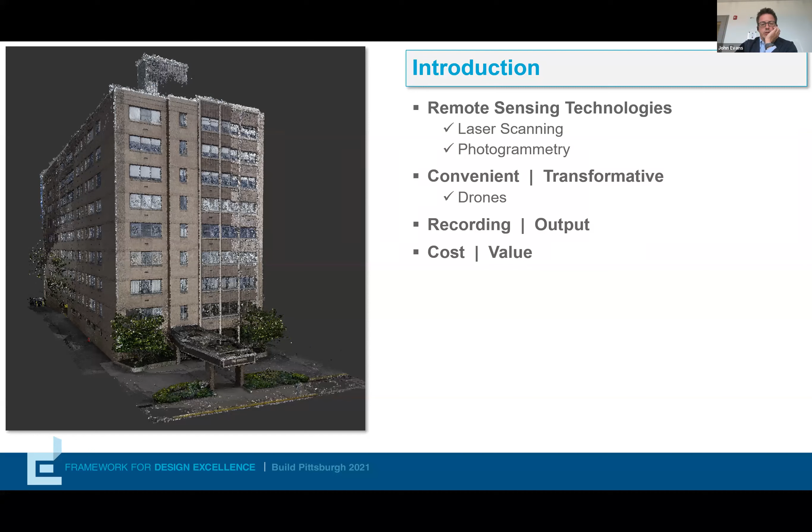So the first, laser scanning, we're not going to get into the details of how it works, but essentially this is the LiDAR system that you see on self-driving cars, where you're actually actively sending out a signal, receiving that signal back, and using it to develop typically a three-dimensional point cloud of the objects that you're scanning.

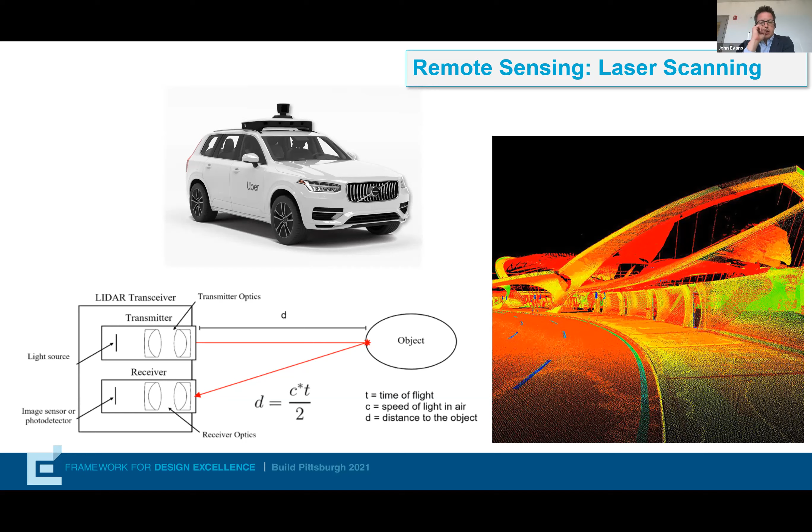Cars are doing this from a single moving point, and they have to do it really rapidly. For buildings like the old TWA terminal that you see on the right, it's done from usually a series of, it could be 50 or 100 stationary locations, but the principle is kind of the same.

Photogrammetry, which I think people are a little less familiar with, is actually a technique that uses the idea that by identifying common points on a photograph or a series of photographs, you can then determine precisely where those photographs were taken from. And you can actually start with multiple photos that have overlap to construct a 3D model of the geometry based solely on those photographs.

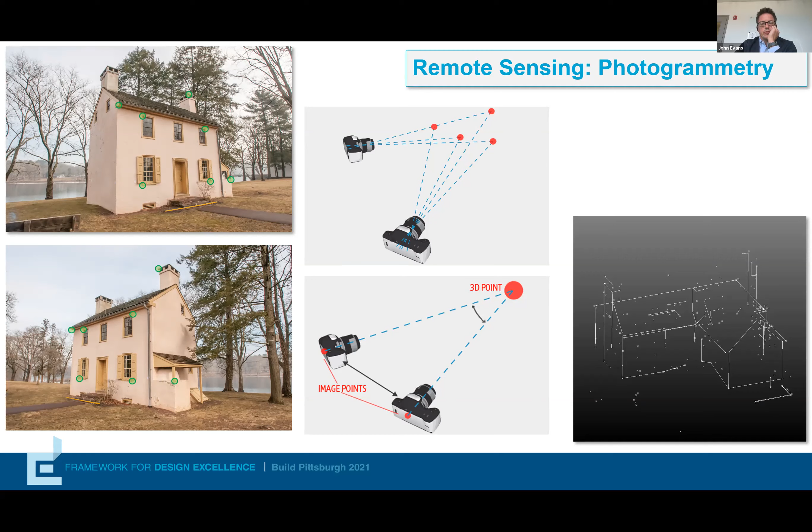So two very different techniques, and we'll get into how they're different and what those differences mean in a practical sense later on in the presentation. Something I think is worth thinking about as we talk about these different technologies is the idea that, in our industry, there are technologies that are, I call them convenience technologies.

And it sounds silly to say, but I consider the transition from hand drawing, which you see on the upper left, to AutoCAD really was a convenience thing, right? The product is still the same. You're developing a 2D line drawing. You're using a different technology to do it, but at the end of the day, it's still two-dimensional.

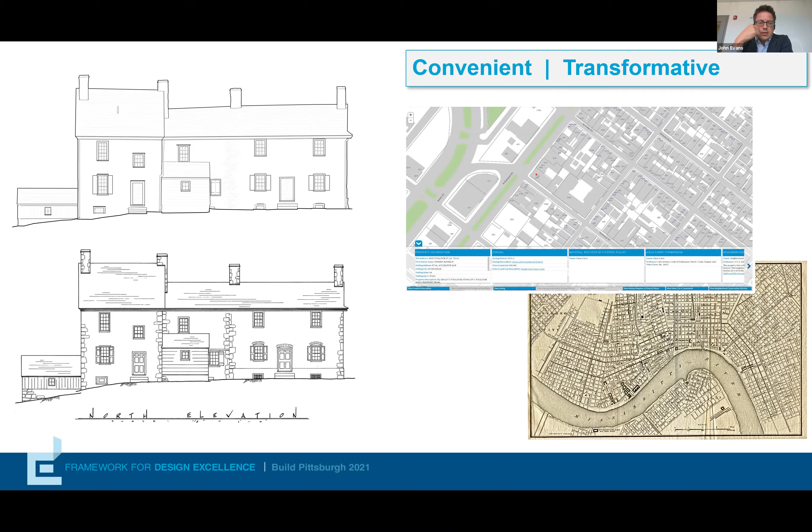When you look at something like the transition from a 19th century map to GIS, that's actually transformative. You're taking something that was always just a two-dimensional depiction and you're layering onto it a database of information that you can access. So I think as we go through these things, especially when we start to talk about drones, it's important to really think, okay, is this something that's actually transforming the data, transforming the way we can work? Or is it just something that's convenient?

A drone, for example, flying a drone is certainly easier, but theoretically, at least, you could obtain the same data most of the time if you had, say, a 100-foot lift that you could move around the building really quickly. The drone's saving time, it's saving money, but it's not actually transforming what you can achieve at the end of the day.

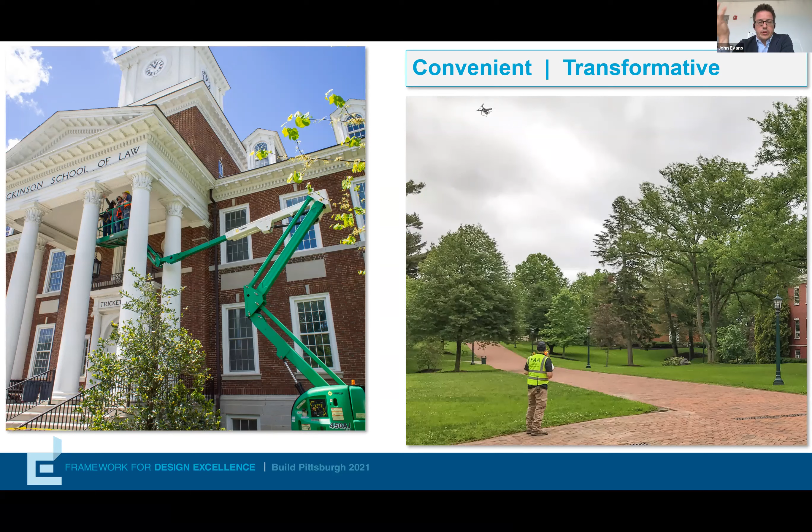Similarly, I think it's important to think about the difference between recording technologies, whether it's a tape measure, a camera, or a laser scanner, versus the output. So the output may be a simple 2D floor plan, regardless of the technology that it was recorded with. And a lot of that also is woven through the presentation that we're going to talk about today.

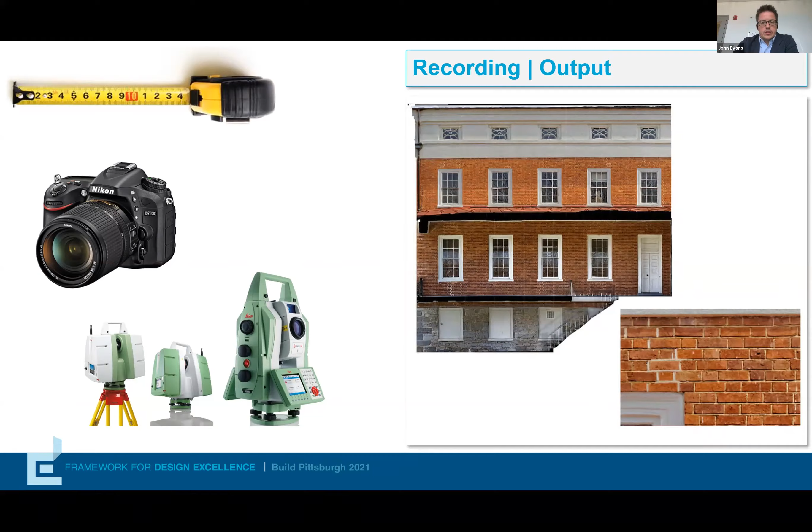And then finally, and this is kind of funny since Tyler did his introduction, but I had this slide queued up. And what I wanted to show is that there's this idea of documentation and a temptation to say, let's just capture everything. And let's capture it at the highest possible resolution we can, and then we have it all and we can figure it out. But a lot of times that ends up really costing money, resources, time, without delivering real value to the project.

And this was actually an example of a point cloud where we determined that because of the nature of the project, we'll talk about that a little later, we didn't actually have to scan the roof at all. So we didn't really need the data on the roof as long as we can accurately capture the exterior elevations.

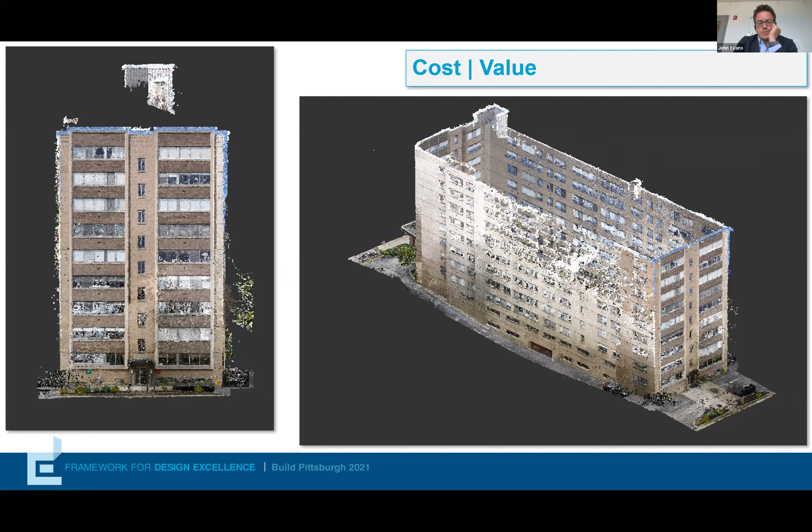So with that, I'm going to turn it over to Sean and to Matt, who are going to talk a little bit about laser scanning. Yeah, thanks very much, John. Hi, my name is Sean Higgins. I'm from Langan Engineering, and I've been involved for quite some time with John and others doing some laser scanning work.

The equipment has changed in that realm quite a bit, but also terrestrial laser scanning has changed quite a bit, in that you can now get these scanners placed on a backpack. So you can actually walk through a building or even have a handheld wand type unit and gather existing conditions of building interiors. Similar to what John mentioned from the photogrammetry, they get stitched together by finding common points and then putting those together and creating pretty decent output.

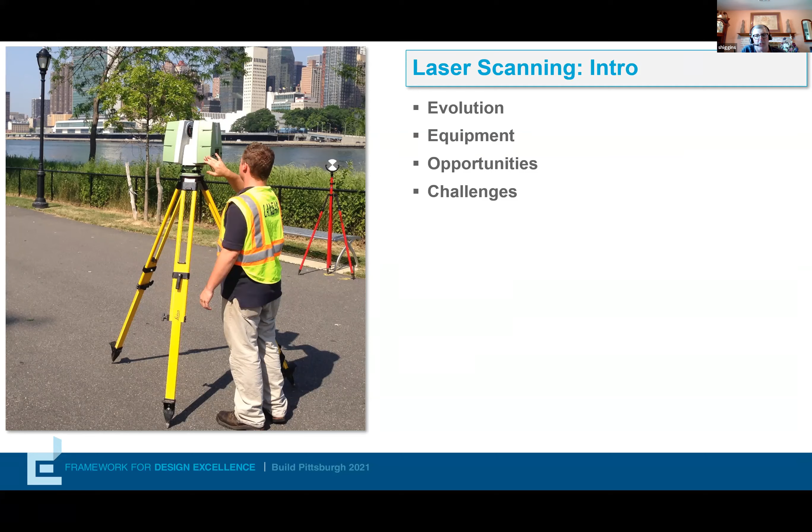The big difference here is in the equipment. It's a little bit cheaper now, but you just need to be careful with the accuracy. So it's very, very important that you're very specific about what you need as a deliverable, what the accuracies are that you need when looking at contracting with somebody. And then Matt will go through some of the opportunities and challenges and a little bit more detail about the scanning services that you can seek out from similar providers.

Thanks, Sean. Yeah, so actually, talking about this presentation, Mr. Evans, John, brought up a good question. He said, hey, let's look 10 years ago and compare the differences 10 years ago to today. It was kind of funny because it was like a trip down memory lane. So this is what scanner was pretty common 10 years ago. On the left-hand side, you can see one of our crews working.

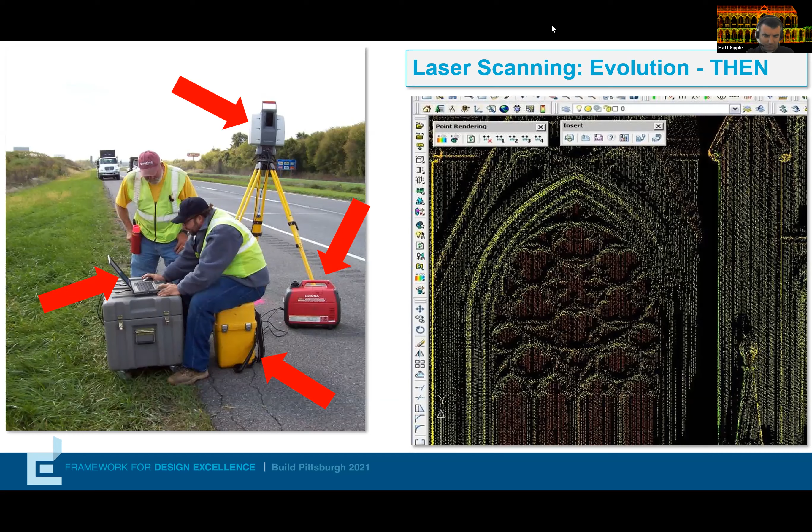So we'll fast forward 10 years. A lot of advancements have been made in scanning technology: the speed of scanners, how much data they collect, the resolution of that, the accuracy. So you can see now how much different scanners are now. The manufacturers of the scanners like to brag now, saying, oh yeah, we can get up to 1 million, 1.5 million points per second. So the scanners have gotten really faster, and thanks to a lot of the advancements in the hardware, they've also gotten smaller.

The scanners now too, the mirrors go all the way around, whereas previous scanners could only go to a certain range. So now we're picking up everything. John, you want to go to the next slide?

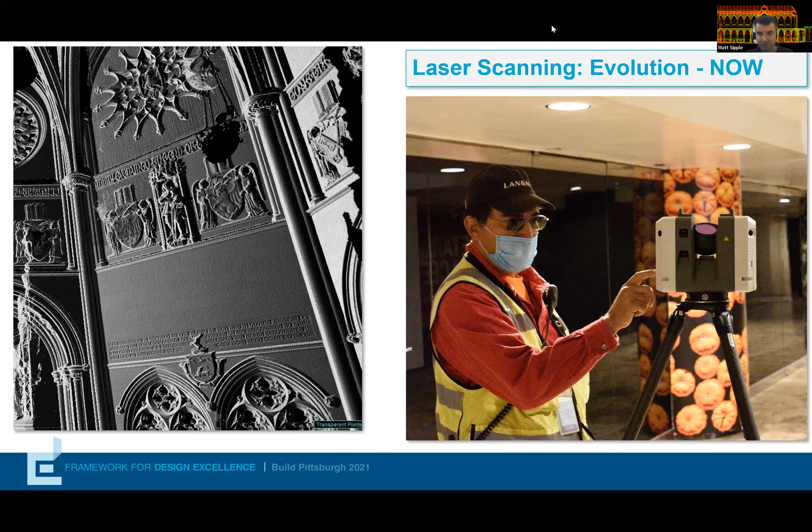One of the biggest challenges with laser scanning is that it's a line of sight technology, meaning if you can't see it, the scanner's not going to be able to see it. There are some non-destructive ways to get inside of walls, but we can't see. One of the biggest questions we always get is, "Hey, can you tell me where the studs are on the wall, or where the pipes are on the wall?" You can't do that because again, laser scanning is line of sight.

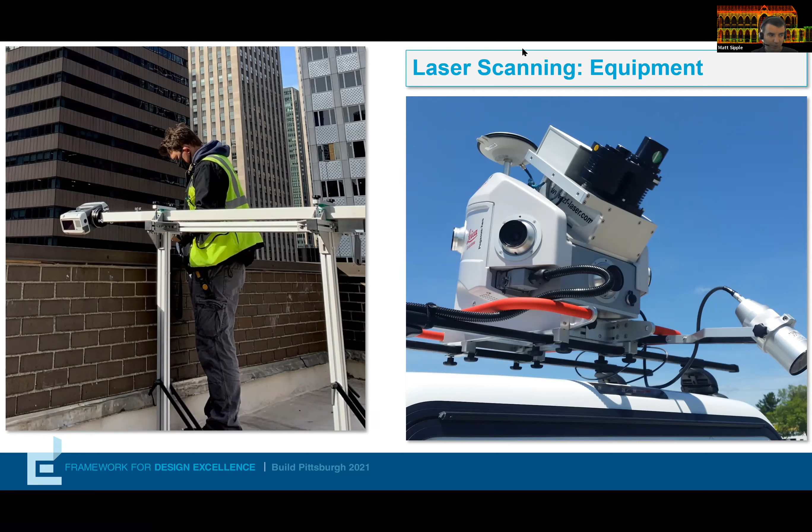On the right hand side, as Sean was mentioning earlier, is mobile scanning. That's really become a big development over the last probably 5 years, where the scanners aren't fixed to one place with a tripod. You can now put it on top of a vehicle. This is a truck. We put them on top of carts. You could even have them on boats. We've even done a few projects scanning from boats, and it's really opened up how we're able to use the scanner. John, if you can go to the next slide.

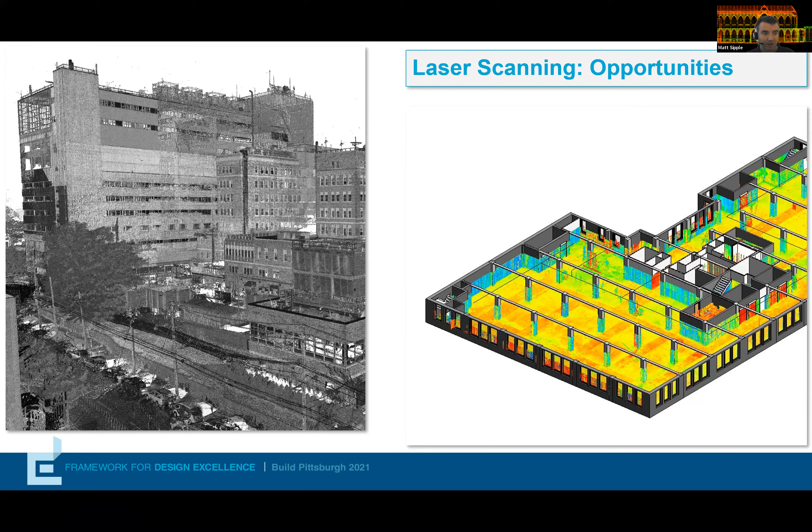They were like, "Well, we had to scan it. Why wouldn't we scan it? It won't take us that long." It's a lot quicker to do smaller projects, as well as the large, complicated projects like you see on the left. Next slide, John.

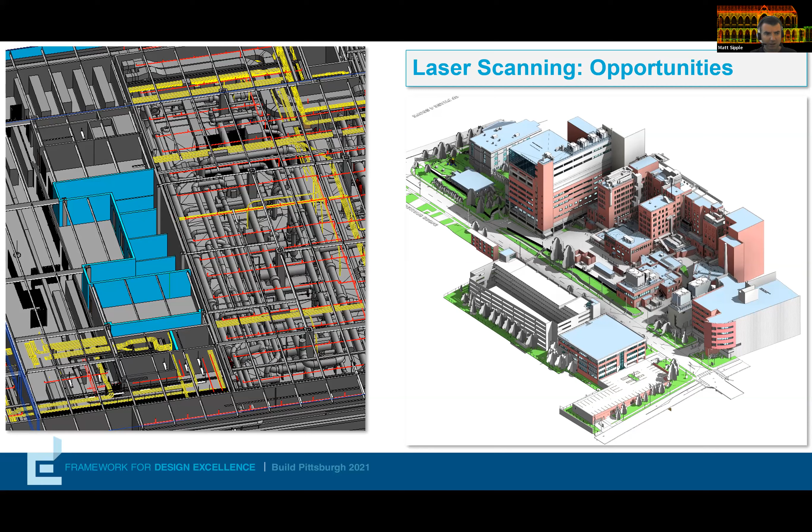Also, modeling. There's a lot more use of BIM, especially over the past 5 years. A lot more companies are using BIM now. 10 years ago and before that, with a lot of scanning, we were taking all that 3D information and just reducing it down to 2D drawings. Now with the rollout and popularity of BIM, scanning is perfect for that because it collects a lot of information in 3D, and we're able to use it to create existing condition models that we hand over to other teams. I think we have one last slide. So the one last thing we were talking about is some of the challenges.

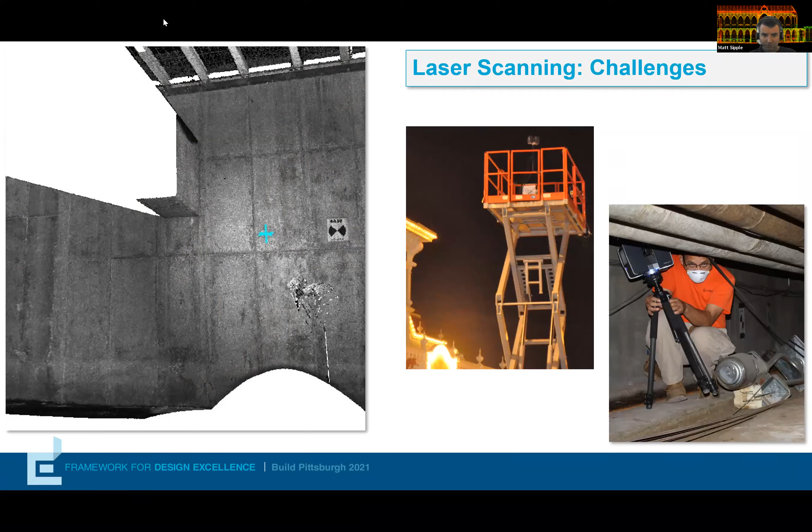So a question that comes up a lot is, can we use a lift to do that? And we can, with a scanner, but you really need a stable platform. So there's a lot of challenges when you start trying to get higher up on buildings to get some stuff that you may not see from the ground level. So that's one of the challenges that we still run into. Now I'll turn it over to Peter and he can talk about his work with photogrammetry.

All right, so everybody can hear me all right? I don't see my picture coming up there. I'm not sure. Yep, you're good. You're on video. Okay. Mostly, your beard. All right, so let's go to the next slide.

I got started working with photogrammetry 30 years ago in the 90s when I was working as an architect in France. I found a little company that was doing work at the Notre Dame, took a career change, wanted to understand what this was like, and eventually came back and started a company here in the US. Photogrammetry has been really an interesting thing for me. The notions behind photogrammetry really do predate even photography. It has to do with the relationship of a single point and an image plane.

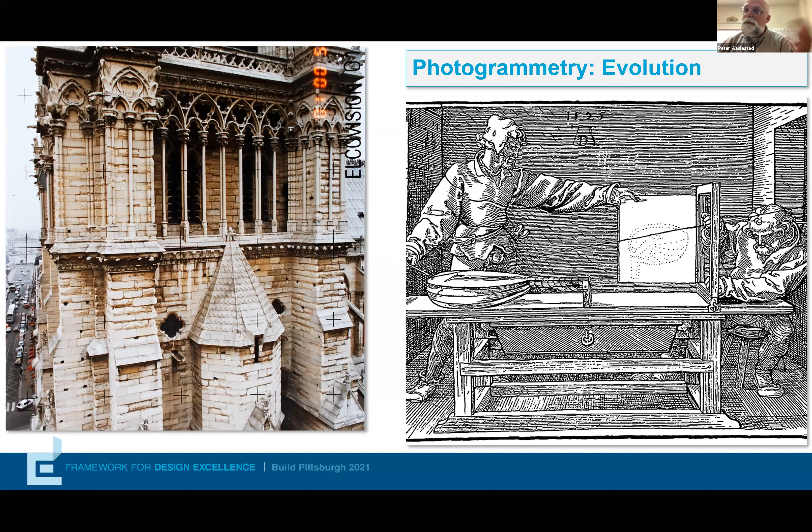And this drawing on the right, which is from the 16th century by Albrecht Dürer, is showing a way of understanding an object from a single point of view through a picture plane by tracing rays as they pass through a plane to create a perspective image. So the notions are ancient. But what happened in the late 80s and into the 90s was that computational power allowed these situations to be mathematically modeled and then back calculated so that you could establish camera relationships and then pull 3D measurements out of them. So it was a big leap forward. Go ahead to the next slide.

So when I was in France, this on the left is the Basilique Saint-Denis, we were basically making drawings that were being plotted and put onto paper and then given to stonecutters in the field. When I came back to the US in '92, CAD was starting to take off, and so a lot of the drawings I made were for print, but also for people using CAD.

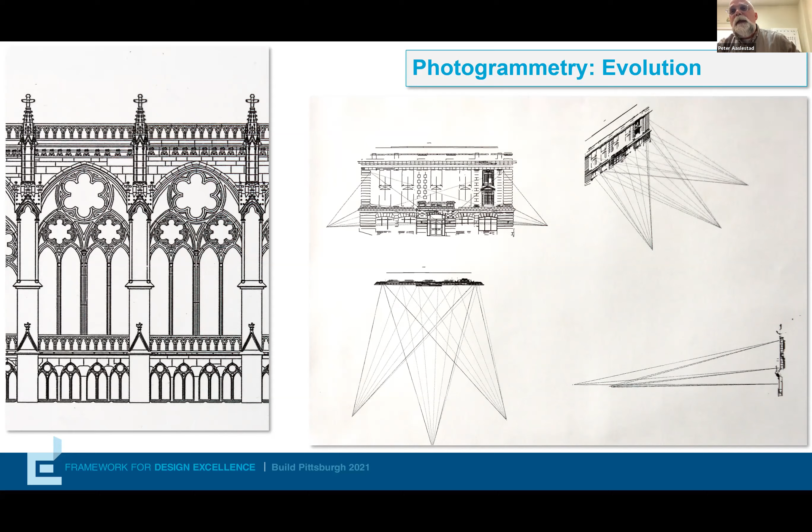Back then, photogrammetry did not produce point clouds. You were using photogrammetry to determine XYZ locations that were specific to a point on the building, but then you could connect them together and make these skeletal 3D drawings like you see on the left. And they served really as field notes for making measured drawings. On the right is a HABS project that I worked on, where the deliverable is a 2D drawing. My field notes essentially were a 3D drawing that I was looking at, interpreting and turning into a 2D drawing.

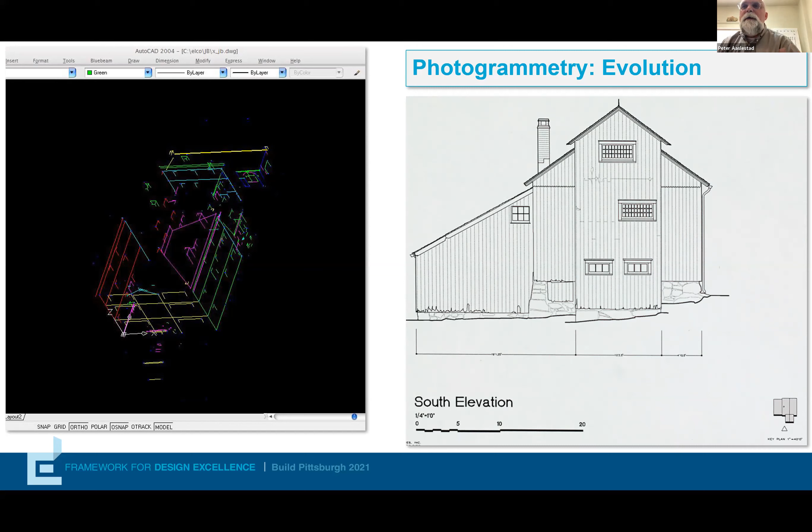But the points I was choosing, we used to call them smart points because you weren't looking for an edge from a cluster of points. You were asking of the photos, what can you tell me about the building? And you were saying, I want to know this particular point. And all of your points could be traced back to a photo-identifiable location. So you were sure that you were talking about one corner as opposed to another corner because you were

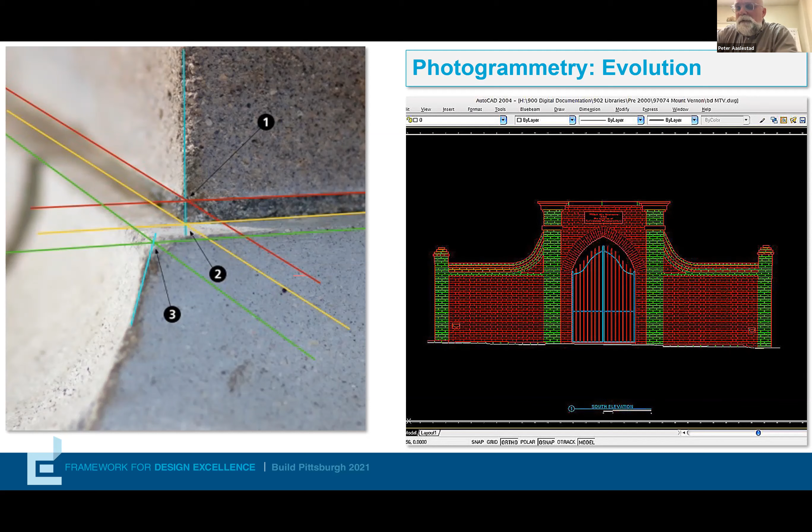manually selecting it. And then when you were working with flat planes, such as on the right is the tomb for George Washington at Mount Vernon, well, him and his whole family. We were charged to locate every single brick in this, and so what that meant was using the smart points to get a layout of the planes, but then we were tracing on images to get the actual photos, which was obviously very time consuming.

And so around 2000, I started thinking, what if we combined digital photography, which was just coming around then, with line drawings. And so this project, this is a theater building at Wesleyan University in Connecticut. A lot of it is made up of cut stones. These I measured with photogrammetry, making a line drawing. And then for all of the ashlar pattern stones, I thought, what if we captured those and represented them with

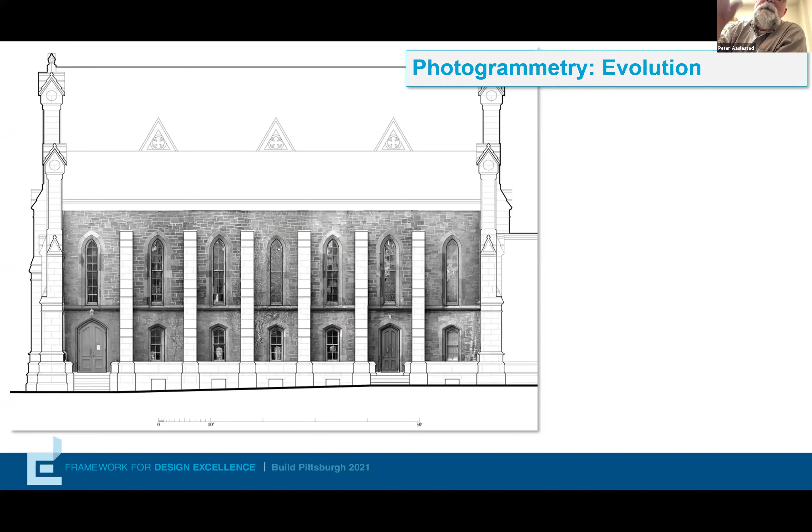flattened digital photographs? And these were shot with a Nikon, was it 990, which is a 3.2 megapixel camera. At the time, it was pretty good, and it did the job. This was using Photoshop to sort of tweak everything to make it fit, and we did our best to make it as accurate as possible, so that an architect could map a single conservation technique to a single stone, and get the contractors to come do the right thing in the right place.

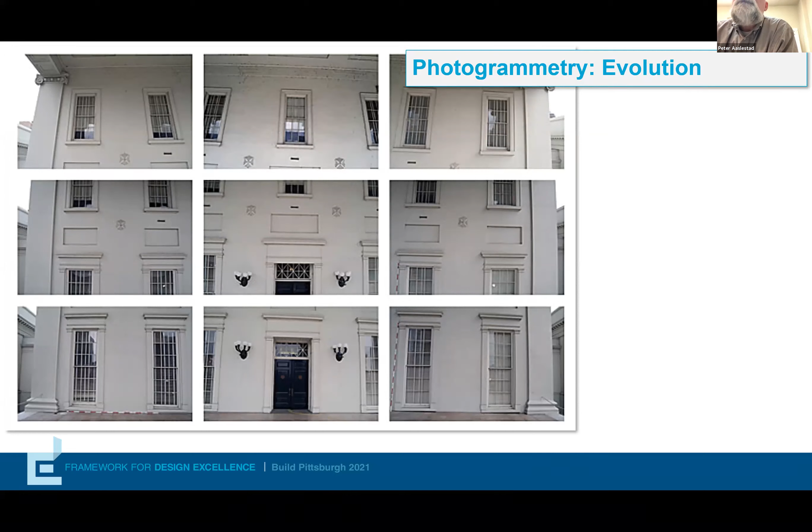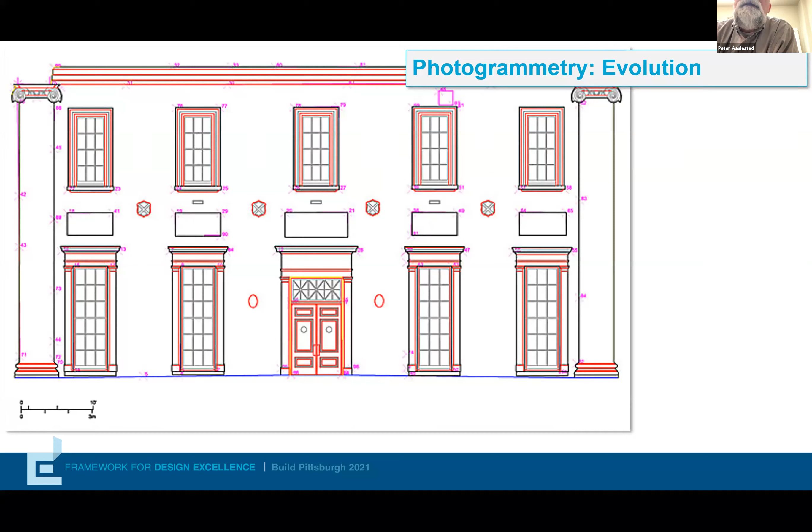And then as the 2000s moved on, this notion sort of became part of the photogrammetry software, so that, this is the Virginia State Capitol we're looking at here, you could take a grid of photographs such as these, and then, next slide, use photogrammetry to create a line drawing to get measured points. That's what all the little purple dots are, numbered points that are extremely accurate in 3D, and then to interpret that into a 2D drawing.

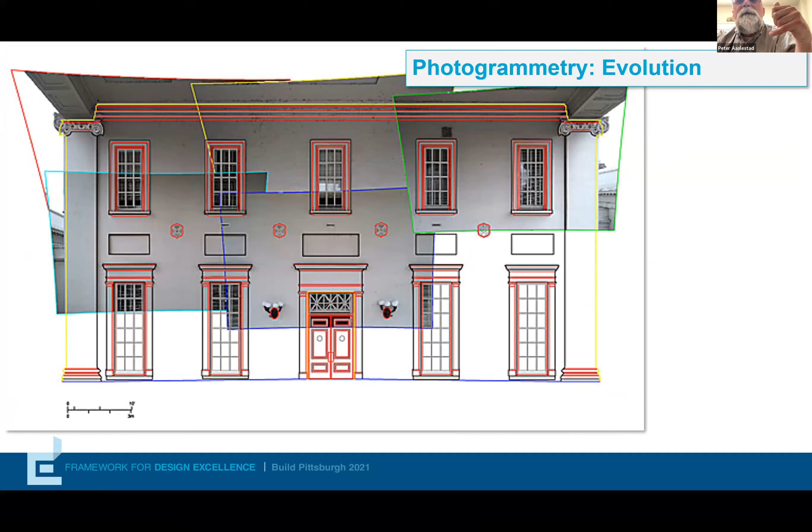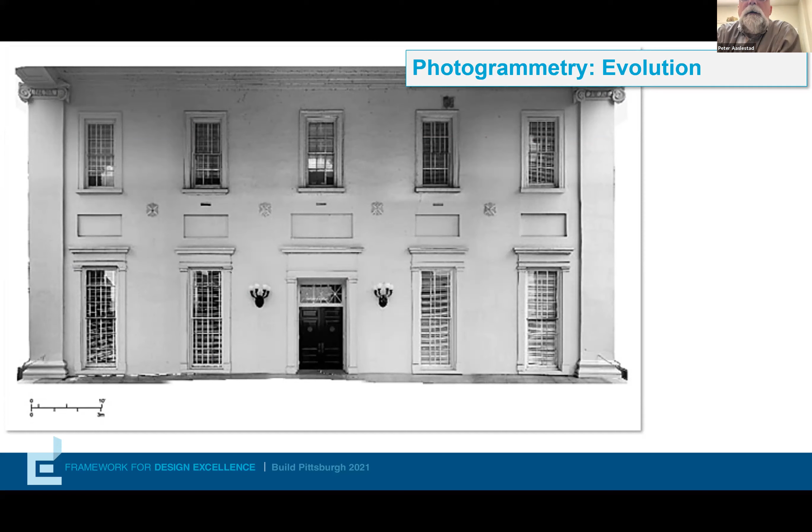And then, since we knew a lot about the camera and lens combinations, we could very precisely remove the distortion from the images and combine them together as an overlay here, and then blend them together and come up with an image like this, where we had to ask ourselves, is this a drawing? Is this a measured drawing that has the same rich data as a photograph? Or is it a photograph that behaves like a measured drawing? And of course, it's both of those things. We called these hybrid drawings at the time.

And what we were able to do going forward from that point was to mix these rectified images together with the line drawings. And in some cases, we would make a detailed drawing of a structure, and then we would have to figure out which planes we're going to treat with rectified photography. And together it could make a very complex, large drawing.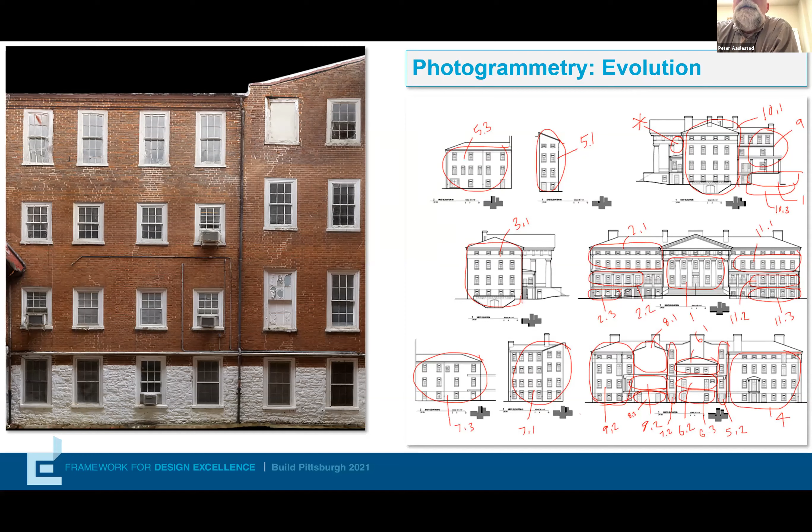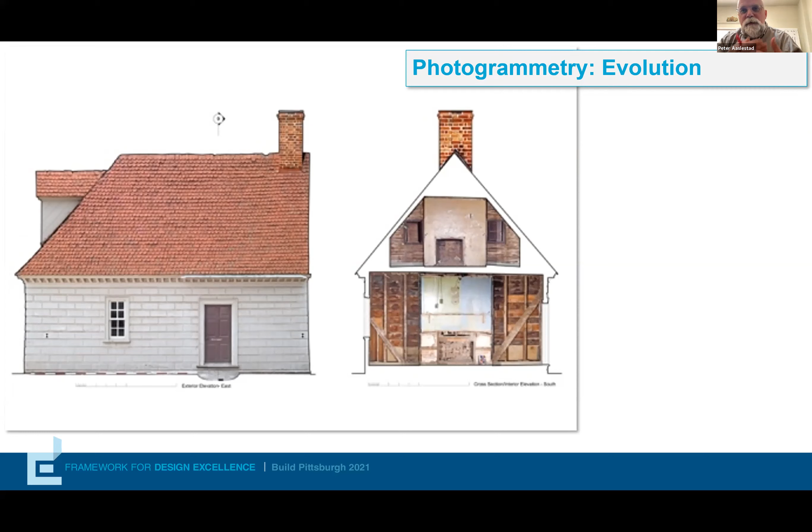Or this is the gardener's house at Mount Vernon. We could also do it really kind of small scale and intimate, and also go inside the building and connect the rectified planes on the inside to the outside, as well as taking the planes themselves and seeing them in 3D. Like the roof on the left, you're looking at a plane that's at an angle, so it's a foreshortened version. And while this looks like point cloud imagery, this is actually just very simple planes and a mixture of line drawings and rectified photography.

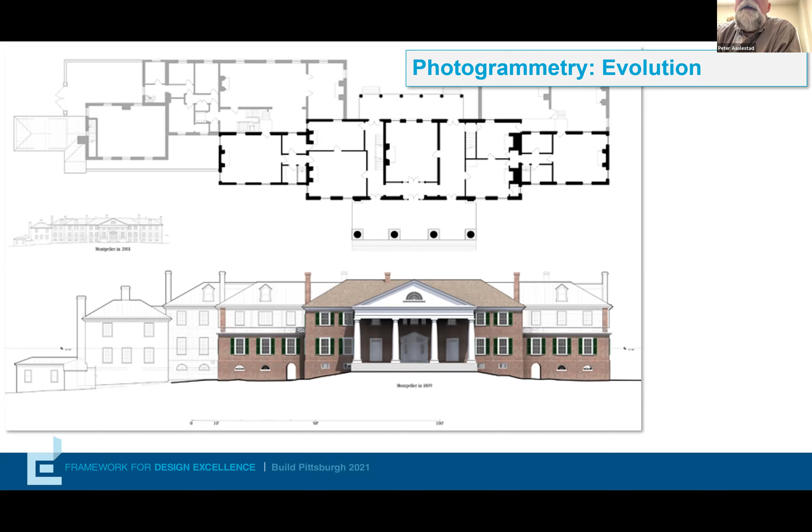And then we had a breakthrough moment with the work we did at Montpelier, James Madison's home here in Virginia. That was a much larger building owned by the DuPonts, and we were charged with asking, do we have enough historical material to faithfully bring it back to the way it was in Madison's time? There was plenty of material, and the whole project is now completed. But there were a couple of things that were also fun discoveries at that time.

And one was this notion of having layers of data, so that here as we excavated and did investigations into the building, such as this showing the location on the upper left. On the lower right, you can see how there were a series of rectified images that documented findings as you went through in layers, which now we call 4D.

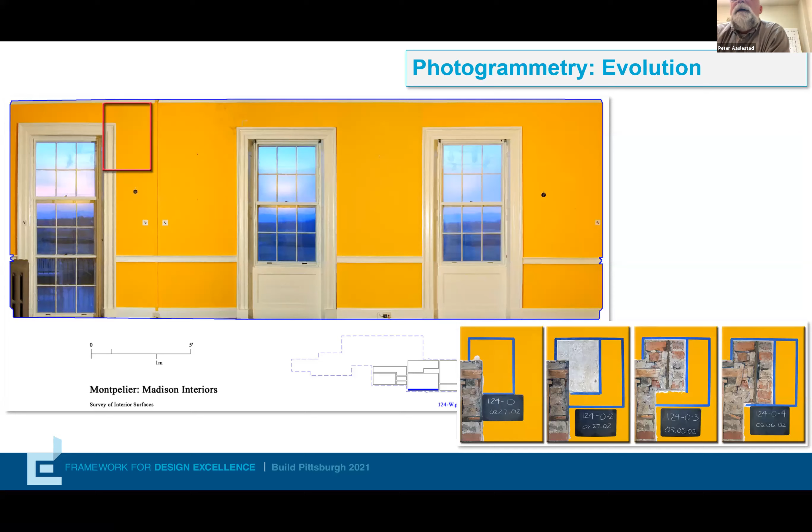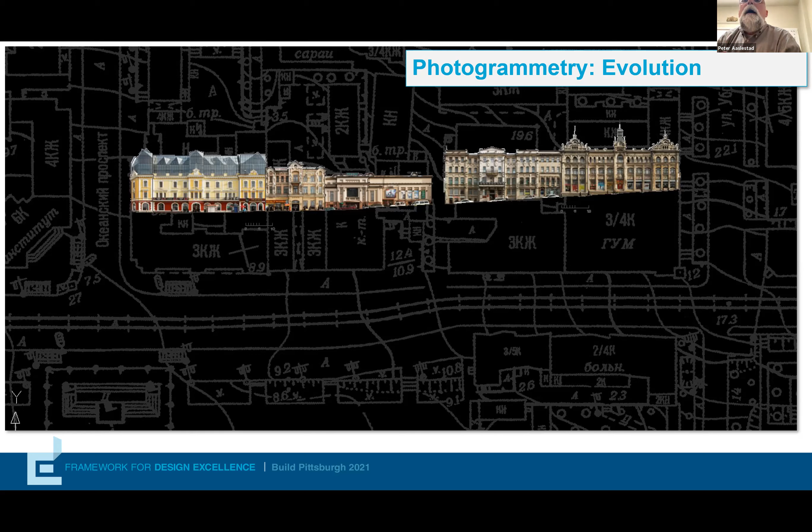Also, with rectified imagery, we could also work on an urban scale. This project was in Vladivostok in Russia, where we were charged with, I think, 75 blocks of historic facades, 5 miles or so of documentation to be captured. We had a week to do it, and so we went through and used photogrammetry to get our precise points, so that things would be rectified to scale. But then, instead of doing any drawing, we just used the rectified images to create the streetscapes.

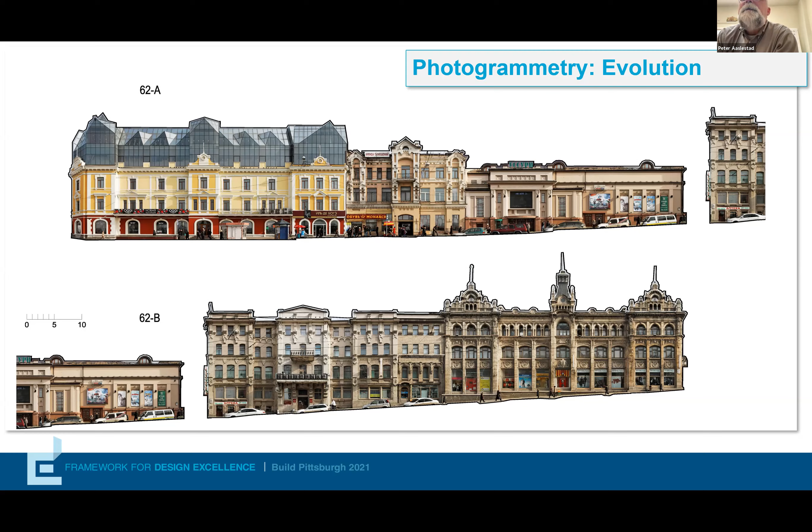And there are lots of errors inside of a rectified image like this when you have a very three-dimensional situation. But it was a great way, really the only way we knew how at the time, to capture all that data and represent it faithfully with such a large amount of data. And then just take a break here, because that's sort of all some of the notions that I was working with.

But during this time, the software was starting to become automated, where instead of having a user have to enter in data to figure out where cameras were related to each other, that started to become automated. And then once that was automated, the other thing that started to become automated as well was taking the camera work and starting to create point clouds.

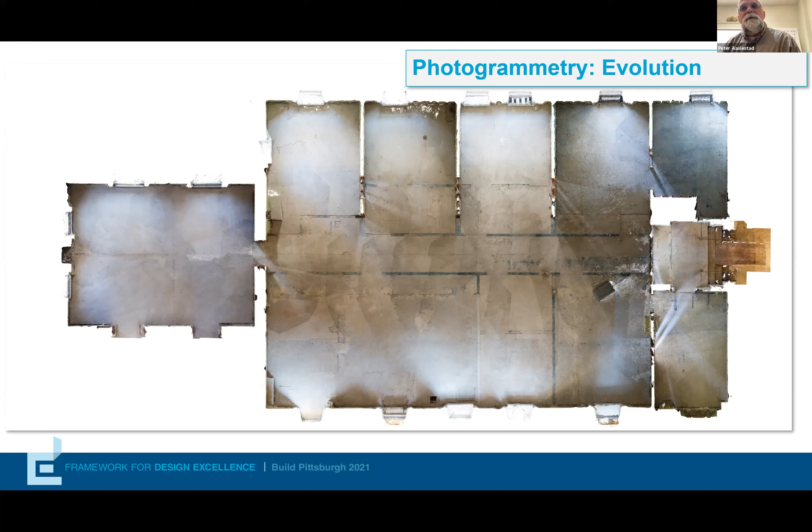And for a while, the point clouds in photogrammetry were sort of like what you saw earlier with the difference of 10 years with the laser scan point clouds. They were very sparse, and then they've become richer and richer, so that now we've got really a total convergence where laser scanners and photogrammetry are now making the same thing, which are these point clouds. And you can look at that and say, is this a point cloud or is this a photograph?

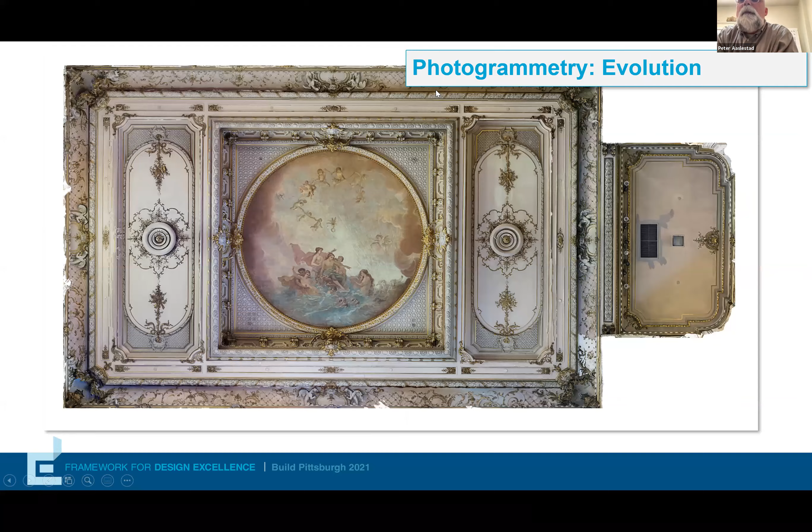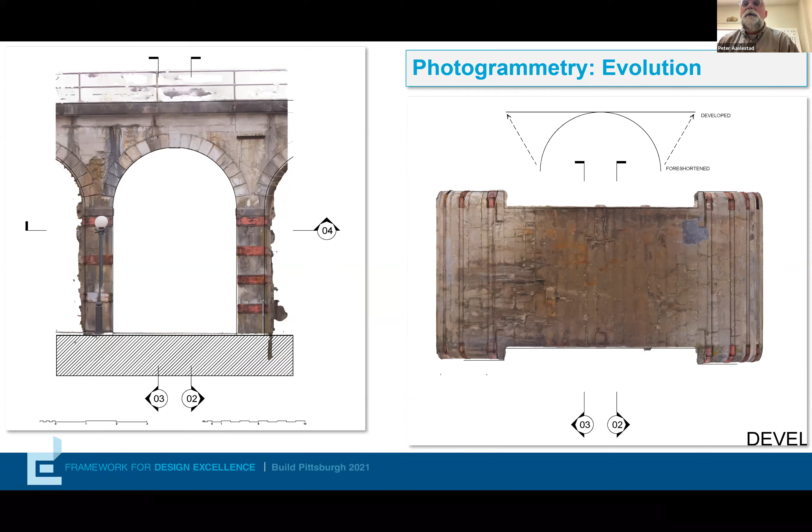The other thing that's been really exciting with point cloud imagery is, in order to map some curved surfaces, we're able to flatten them out and develop them, and so in a way that completely gets rid of the notion of dividing buildings into panels and flattening them out. So we're totally in with point clouds now. This is a sculpture, totally non-architectural form, totally organic form that's captured with photographs and can be analyzed a number of different ways.

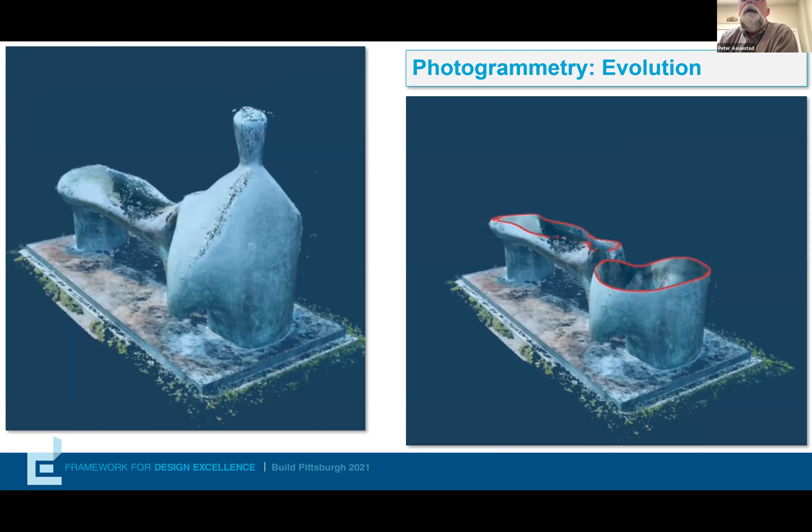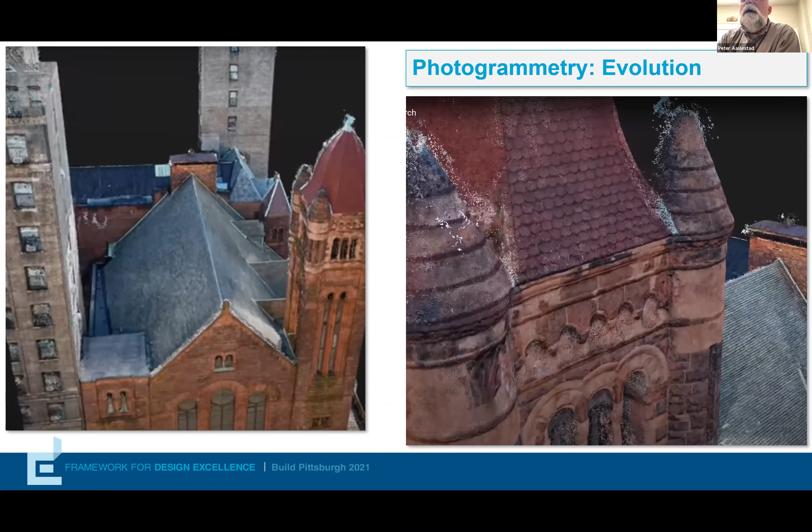This is a building in Manhattan, which we shot mostly from grade, but a few shots from rooftops, that we can create a point cloud and then fly around sort of like a virtual drone, even though there were no drones used to create this imagery. And then lastly, this is a project from last fall that I did, which is at the dome in the state capital of Kentucky. And this is using drone imagery, ground photographs, rooftop photographs, as well as laser scanning, all in one project. So we're all working sort of on the same page at this point, and there's a lot of convergence.

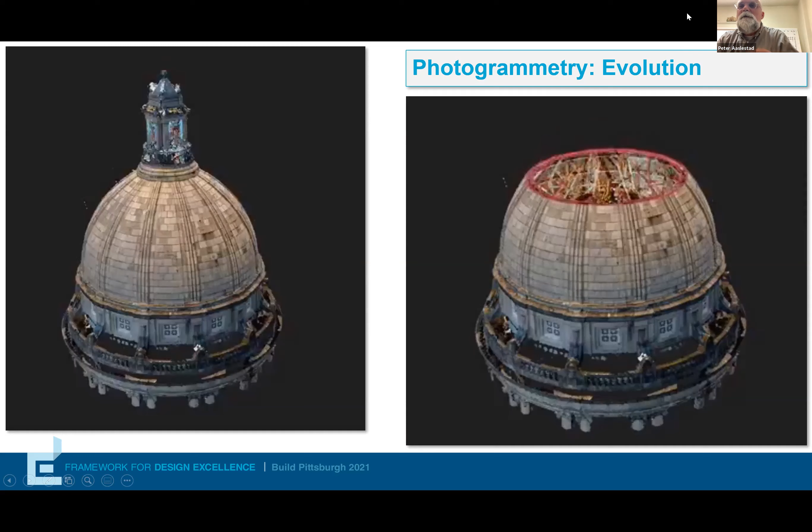Equipment-wise, one of the advantages that I see is the flexibility of getting everything with just a camera. You can put a camera up on a mast. Obviously, cameras are mounted onto drones, so that's a great way to collect data. You can even do work with iPhone photography. And with COVID, this has been a real bonus for me, because I've been able to collaborate with people all over the country, where I do some training by phone. They send me pictures and I can send back point clouds.

The limitations, so we're in opportunities here. So it's functional with low cost equipment. The remote, okay, so I covered that. The one point there, the data coverage, multiple points of view, that's important, because one of the big things that we're all struggling against are data shadows. And with photogrammetry, you're not getting scans from a single point of view. You're oftentimes getting hundreds of points of view with each image. And so you can see around things like trees or furniture, different things that would be blocking you.

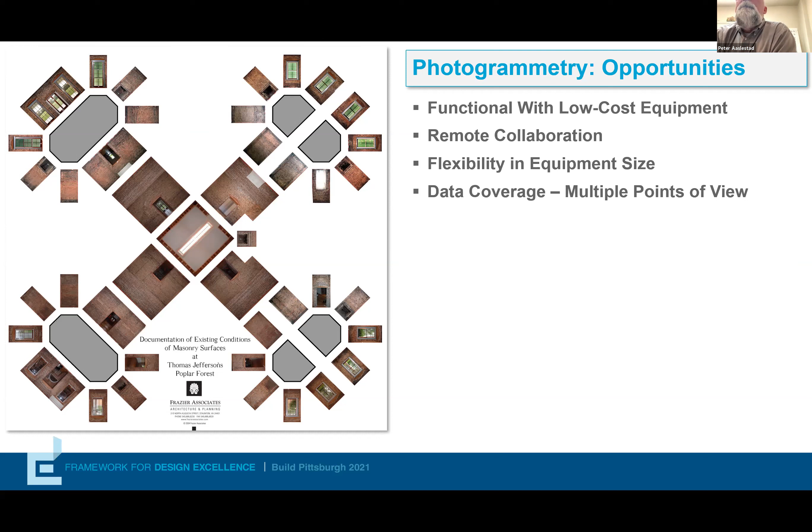But still, access can be an issue. Having neighboring buildings can make your camera's angles very difficult. So you do have differences with data shadowing, and then lighting is also an issue. When you have a very crowded room, shadows can create all kinds of problems. So that's another issue that sort of says that to do this at a high-end level, there's a lot of skill that's needed.

But there are also opportunities at the low end through collaboration. So it's a wide open field, really, and lots going on right now. Thanks, Peter. So I think, Matt, if you want to go through this pretty briefly, we could just talk a little bit about drones. Thanks, John.

Yeah. So, and I think John mentioned this earlier on too, we couldn't talk about modern documentation without bringing up drones, because this is something that's been very new, recent. But I think I speak for myself and Peter: the technology behind what the drones are actually doing isn't that new, because it's mostly photogrammetry. Now there's scanners on drones. Really, the big thing with drones is the ability to get up and get higher places that you weren't able to previously. That's sort of like the evolution.

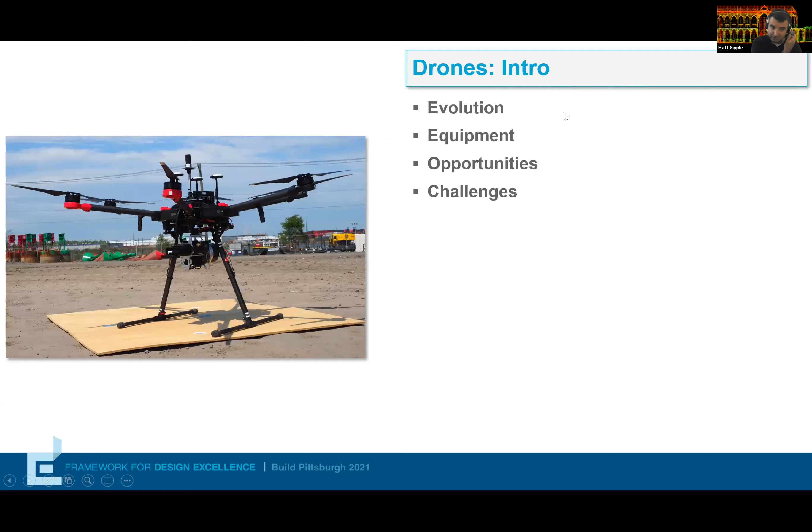This is a picture of one of our latest LiDAR drones. But yeah, you can go to the next one, John. Really what drones are mostly used for is obviously taking aerial photos from the air. I don't have any good photos of a building surface, but they're really good for acquiring data, especially over vegetated stuff. The LiDAR is really good for that. But it's a lot of the same types of processes that Peter was talking about, where you're taking multiple photos and stitching them together, which actually kind of leads us to some of the challenges.

So one of the biggest challenges: we have our own drone fleet, but we get a lot of calls and people saying, hey, can you go fly my site? Can I get the photos by the end of the day? There's a lot more to that if you're really doing a full drone data capture project. There's a lot of planning that's involved. There has to be a lot of overlap. I'm sure Peter can get into the science behind how much overlap you need from photo to photo in order to make a great photo mosaic. And it's a lot of information. It's easy enough for somebody to take a drone and go up and take one photo, but if you want to turn that into a photo surface, that's a lot more involved.

The federal restrictions on the drones have loosened a little bit over the years. When it first came out, you needed to have a pilot's license, you needed to have airtime. Now there's actually a whole new separate FAA licensing schema and tests that you could take, but you still need to have those, especially if you're flying this as a commercial business. Any commercial use of a drone, you have to be licensed with the FAA. A lot of people say, oh, I'll just go fly it up, I have one on my own. But if something happens, God forbid, there's a lot more liability involved.

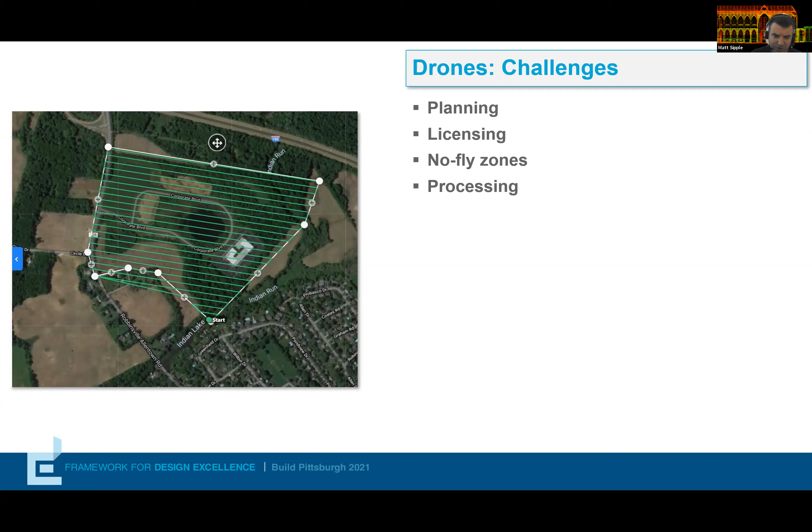Yeah, thanks, Matt. So we've talked a lot about the technologies today, and obviously one of the decisions that we have to make on a lot of these projects is, do we use photogrammetry? Do we use laser scanning? Do we use a combination? Before you even make that decision, you're really deciding, well, is this something we can measure by hand or trace from existing drawings if they exist?

And so before we close, I wanted to touch a little bit on kind of how that decision-making process works. And based on sort of this experience doing all these diverse projects, how do you make those kind of decisions? And you can see here a couple of the things that I think are really important components of that.

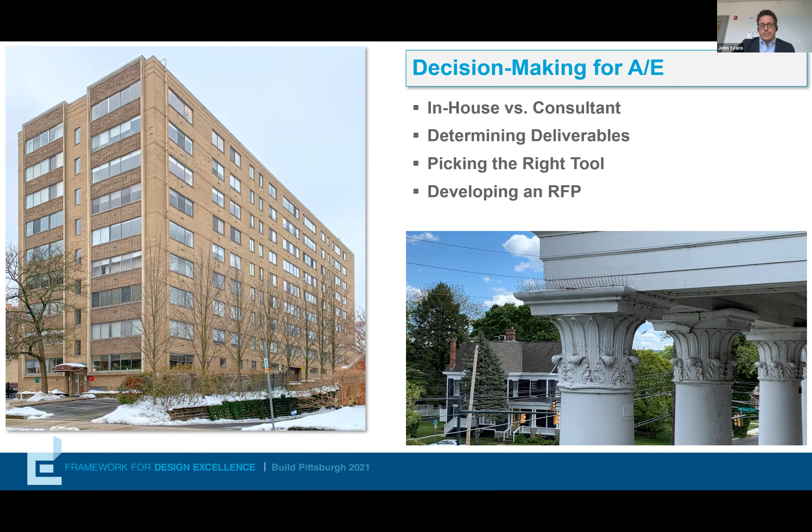The first that I think probably every architecture engineering firm has dealt with is, hey, this stuff's getting less expensive. This equipment is cheaper now. Can I do this in-house? And really that decision comes down to the cost of the equipment, which is certainly getting better, but also the training. You could hand me a laser scanner tomorrow, and there's virtually no chance, even with my experience, that I'm going to get the same quality data that Matt and Sean are going to get from their scan.

Or you can give me an iPhone, and what Peter's going to get out of it is going to be a heck of a lot better than what I can, even with the same software. So it's a matter of, do you do this enough to invest in the training? There's also a component of kind of, I call it focus. We're architects in my case, or engineers.

And is our time better spent learning how to do this documentation, which if you learned it 10 years ago, you would be relearning everything pretty much again today? Or is it better to say, I know enough to know what I want and know what I need, and have specialized consultants do that? And obviously that depends on what you need.

This is a case where we have an in-house 3D camera that's relatively inexpensive. It's pretty much point and shoot. And it does give you the ability for a remote site, this is actually at the Nashville airport, to be able to see field conditions. You can take measurements of stud wall height back in the office so that you could minimize field time. Something like that makes a lot of sense to have in-house.

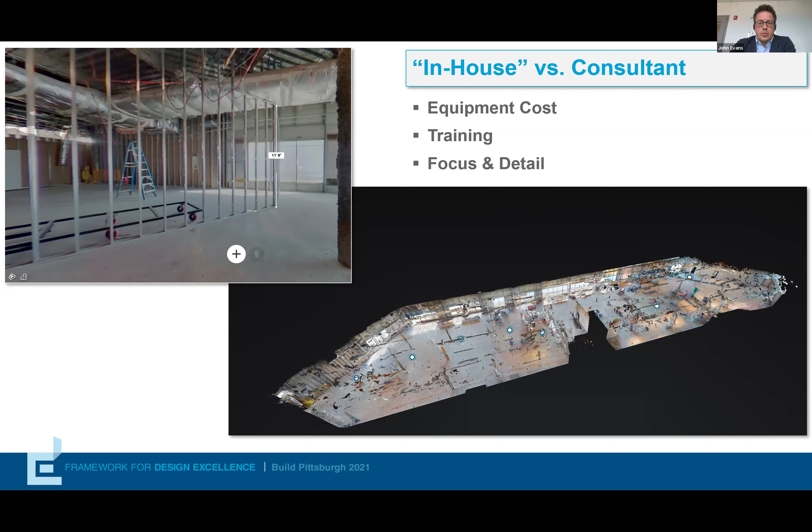For us, at least, the capability to have something like detailed laser scanning is really not practical for most of the projects that we're dealing with. Similarly, this is a project where we're doing a window survey at Penn State. We could go and purchase a drone, but we have the ability, in this case, to use Langan as a consultant, provide the drone services to us to do the photography.

They know the permitting process. Penn State, the University Park campus, is actually in an airport zone, so there's an additional layer added onto that. And we can focus on what we do, which is the architectural assessment, and have someone who really does this on a day-to-day basis focus on the drone work.

The other element, obviously, that's going into the decision is, what are the actual deliverables? So we've talked about how over the past decade or so, photogrammetry and laser scanning have really converged on the idea of this 3D point cloud as the main deliverable that most people are getting when they're using this remote sensing equipment. That obviously was enabled by the software and the capability of computers. That's something that would have crashed a computer 15 years ago, but now has pretty much become the standard deliverable.

But we still have to think about things like the coverage and the resolution. So for the example on the left, and we'll see this again later, we didn't need to get much coverage on the lower portion because the focus was really on the column capitals. On a site like the right, you're really looking to try to capture all of the data for this through the laser scan.

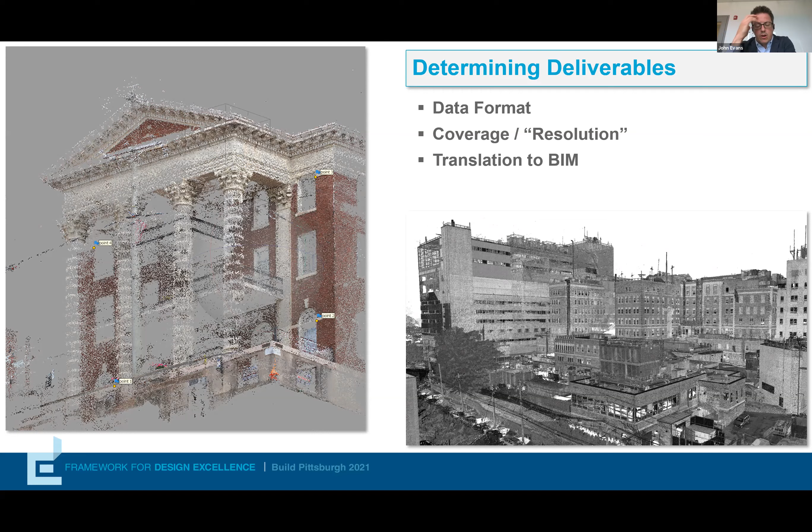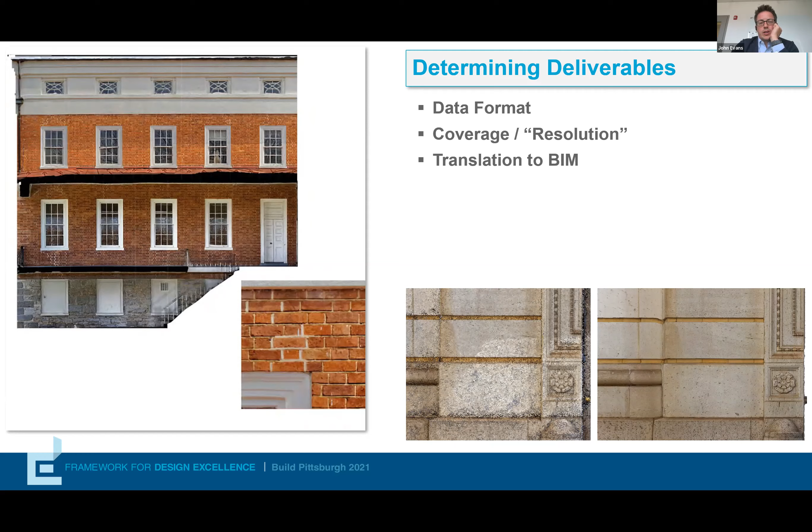And you can see here an example of kind of how that might play out, especially on the lower right. That's a comparison of what Peter showed earlier, which is an orthographic representation of a point cloud versus an actual detailed ortho photograph. Important if you're trying to use it to determine masonry staining or stone by stone condition. Probably not as important if you're just using it to create a model of a building.

So then you have to think about, okay, am I really picking the right tool? Again, laser scanning, photogrammetry, both of these things are available. And with that convergence of deliverables, a lot really comes down to the recording process itself. What are the constraints on the access and the speed?

Peter mentioned the project that we did in Vladivostok. That, particularly at the time, really wouldn't have been feasible to do with laser scanning. We actually had to have the Russian police close down each road for us for about 5 minutes while we did the photography. So it was really important that we be able to literally capture an entire block in probably about 2 to 3 minutes so that we can get out of the way of the angry Russian drivers. Whereas in a case where you have more flexibility in terms of access, you may have a better choice of technology.

4D capture is another component. Is this something that's just going to be captured once, or is it going to be captured multiple times? And that may guide the technology and the deliverable as well. Availability is certainly one. Drones at this point, it's essentially a dime a dozen. You can find people who can provide drone flights. When you get into accurate laser scanning for buildings or photogrammetry, there's really constraints on experts who are able to do this kind of work.

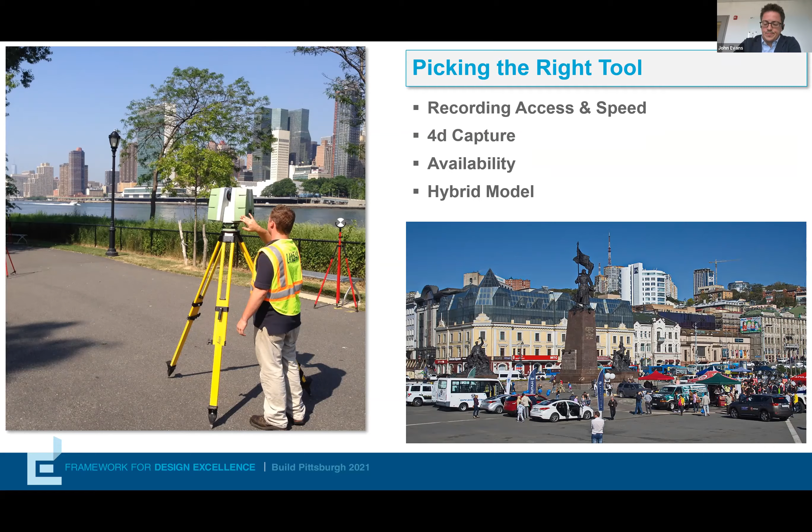So how do we actually do that is obviously another story. We're all very focused on architecture, focused on design. There can be a tendency to just go to someone like Peter or to Matt and Sean and say, hey, I need a scan, give me a price, and you go and do it. We found that it's much more successful if you actually go through a formal process, just like a client would for an architectural project, and develop a real RFP for those services. And obviously there are a few components that are important to define in there if you want to get the best product. The first is the project goals.

Just like a design problem, when you're doing a documentation project, you have to know exactly what it is that you want to achieve. In the case of a building where you're trying to obtain information on the exterior envelope, it might not be important to capture the roof. It might not be important to capture certain detailed elements of brick patterning.

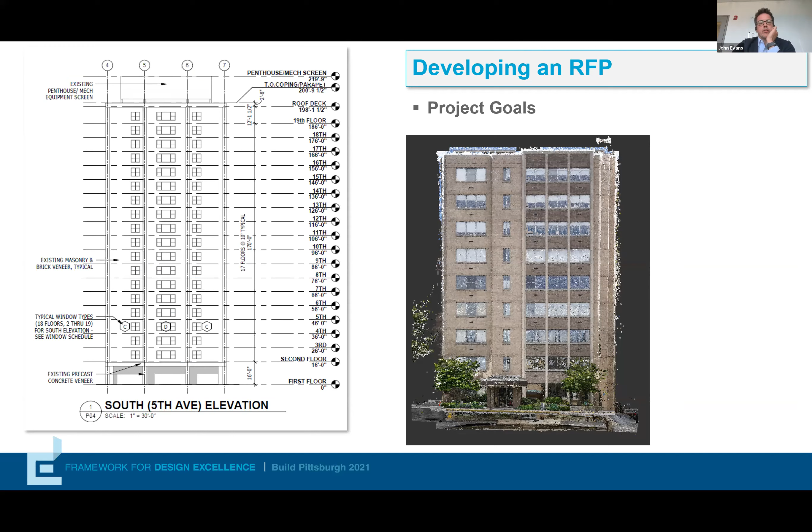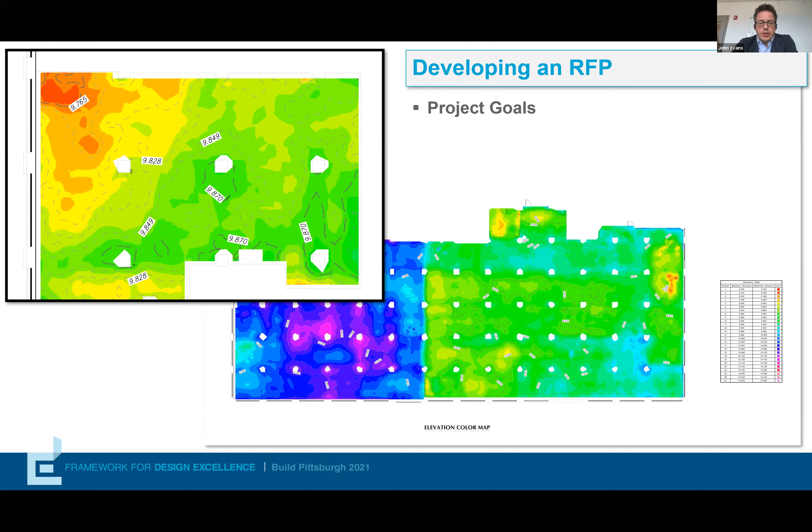Whereas if you're doing a project, which you can do with a point cloud, where you're actually trying to determine variations, this was in a floor slab. This was done actually by laser scanning. But if you're trying to determine where are the high and low points, and you can see the level of accuracy here, if you look at between red and green, just the decimal places, you actually don't need the point cloud necessarily as much as you need this heat map. So that's a very different deliverable than what you'd get if you're trying to do a building.

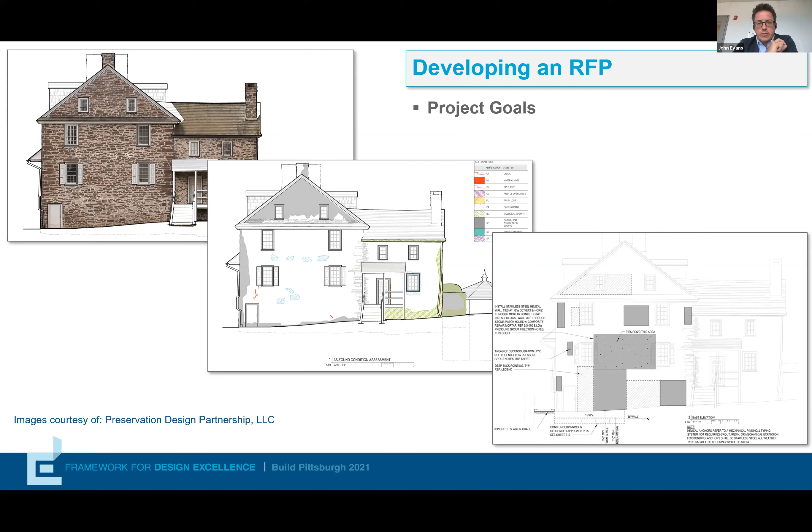In the case where you're trying to look at detailed masonry conditions and truly map the condition of every stone, this was a project in Philadelphia where we wanted to make sure that we were locating the required masonry wall anchors in the mortar joints rather than the stone. And of course, it was a DGS project, so it was going to be public bid, and we had to know the exact number of those anchors, or you were going to get a change order for it. And in this case, we actually needed that orthophotographic representation of this building to make sure that we located on the drawings all of our anchors so they weren't just put through stonework.

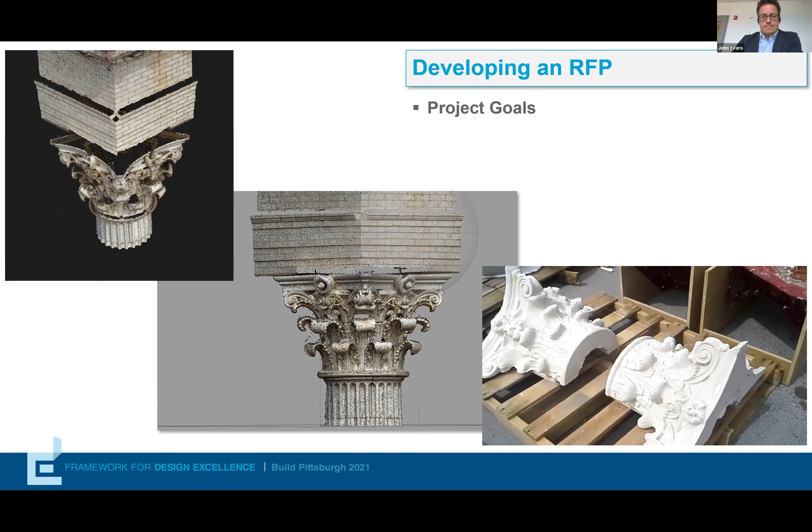Next element is really determining what kind of control points you need. Laser scanning and photogrammetry can be done with or without survey control. There's a level of accuracy that is helped by having that survey control, but also you get the ability to do what Peter was talking about, that 4D documentation at a larger scale.

So a lot of our projects, when we do laser scanning, we'll actually go out and we'll set in the real world a monument that represents the 0,0 point that we're going to use in our Revit model. So whether you go through construction documents, shop drawings, it doesn't matter. That Revit model is actually linked to a real world scenario.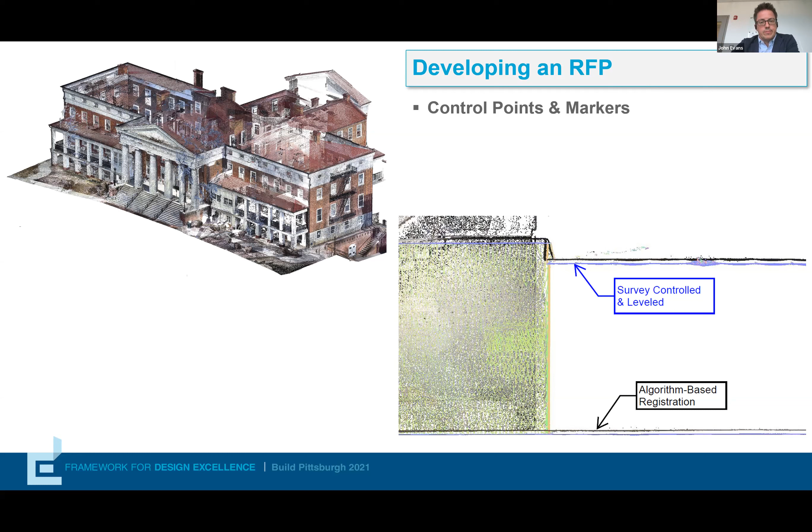You can also use it to combine technologies. So this was a project where we used laser scanning to do the interior, a combination of laser scanning and photogrammetry on the exterior. We did traditional survey control, but then on some of the interior elevations, using the targets that were set by laser scanning, we literally just took photographs, rectified them in Photoshop, and they were close enough. And we were able to reference those in using the targets, and we were able to get enough accuracy without having to use the same technology on the inside.

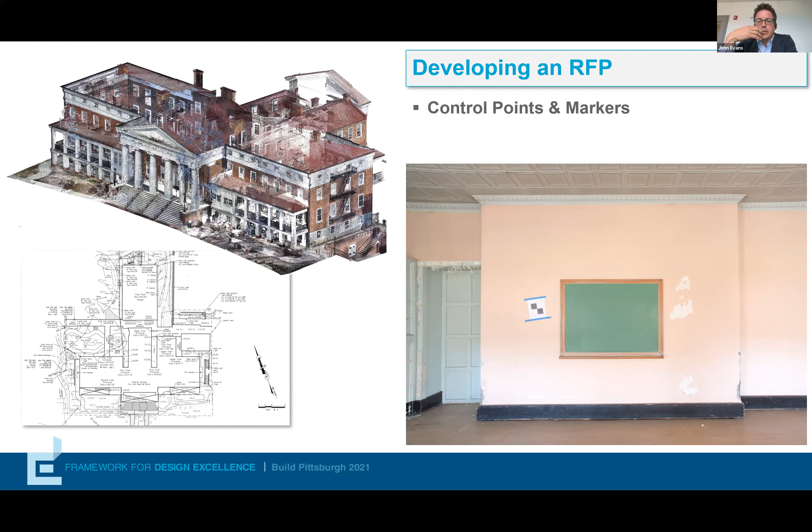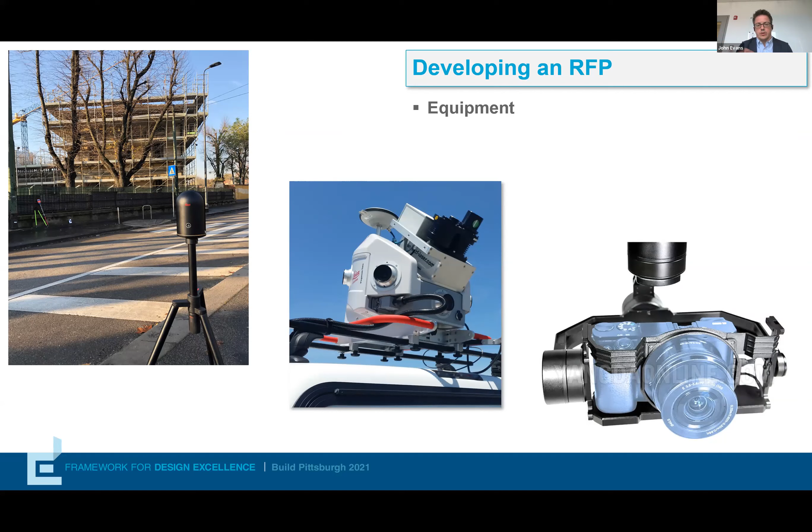Equipment. Again, I'm an architect. I don't know the difference between the laser scanner in the middle and the one on the left in terms of output, but it is often helpful to ask in an RFP for a submittal where you say, prior to the beginning of scanning, tell me what equipment you're going to use to scan it. A lot of times that's just informational. We have to trust the experts that they know what to use, but it is nice to be able to identify, okay, this is a scanner I got last time. Why are we using a different one? Is there going to be an issue with compatibility or anything like that?

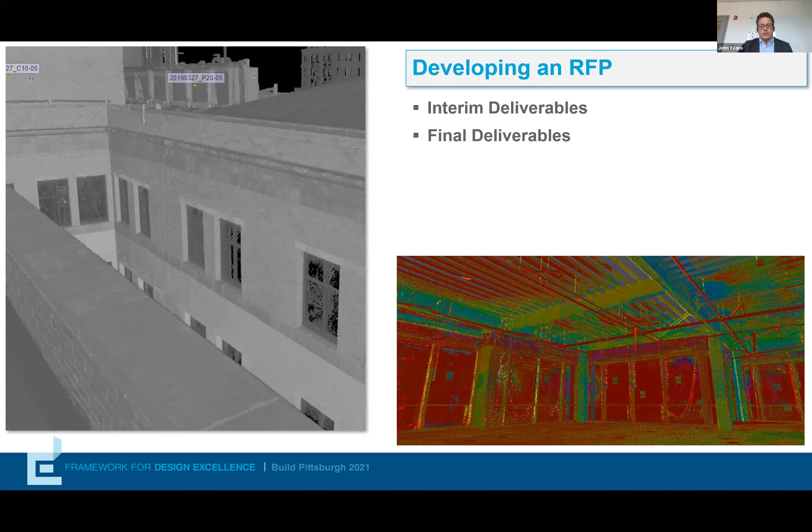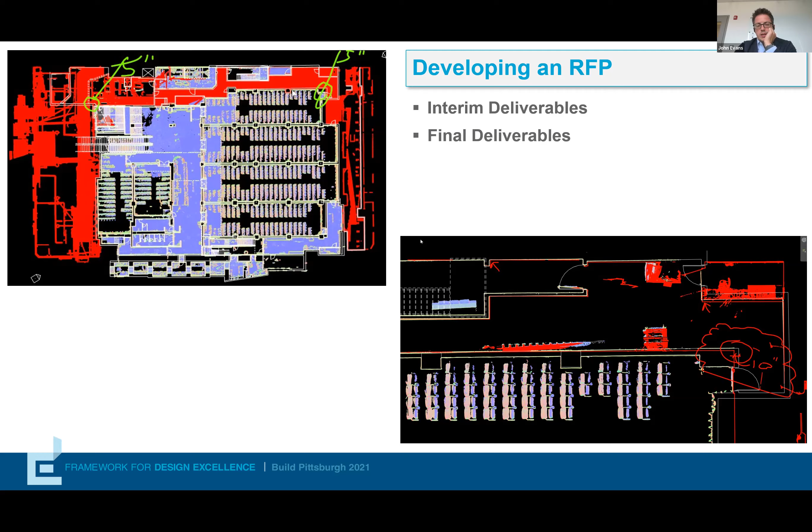And then finally, it's about the deliverable, right? At the end of the day, what are you asking for your documentation consultant? Or a lot of this applies to doing it in-house. What are you actually asking them to provide? A lot of times we'll have an interim deliverable where there may be those survey control points or a partial point cloud where you can start to see, hey, is this importing into Revit correctly? And then a separate final deliverable. But it's always nice to have those interims so you can sort of check, hey, is everything working? Is the import going correctly? When I start to put this into, whether it's AutoCAD or Revit, am I seeing distortions or differences between what the point cloud says and what the existing drawings say?

Similarly, how am I actually aligning this in Revit? Am I asking the consultant to do some of that work for me and lay out exterior building lines in the point cloud, or deliver me a Revit model where the point cloud is already linked in? Or are we doing that on our end and simply having the consultant give us the raw point cloud data, which we'll then use to build the Revit model?

So I think that kind of concludes what we wanted to talk about today.